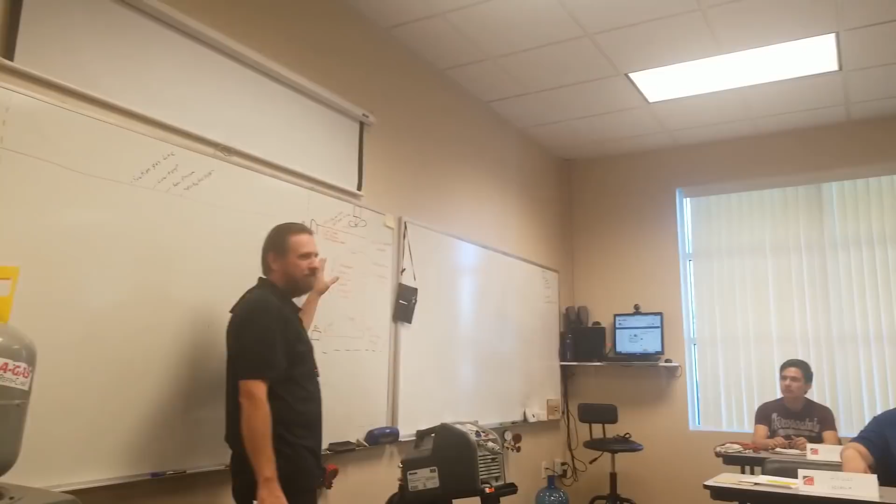All right, so we've talked about doing a pump down where we pump all the refrigerant to the outdoor unit. So after we do a pump down, before we work on this, we still have to get that last bit of refrigerant out of the system, right? Yep. We still have to recover it. Now, if it's microchannel, do you guys see the microchannel? Yeah. You see how important it is to look at the coil to see what it is first before you jump to conclusions? Yeah, very important, right?

So if it's microchannel or if the filter drier is behind the valves, we want to make sure that we do an entire recovery. The only difference between recovering from a pump down system and from a whole system is it's going to take much longer recovering from the whole entire system, especially with the compressor, because the refrigerant's mixed with the oil, and as you pull the refrigerant out of the oil, it's boiling from a liquid to vapor and absorbing heat, and the temperature drops, means the pressure drops, means it takes that much longer to pull out. So there's several steps involved with recovery.

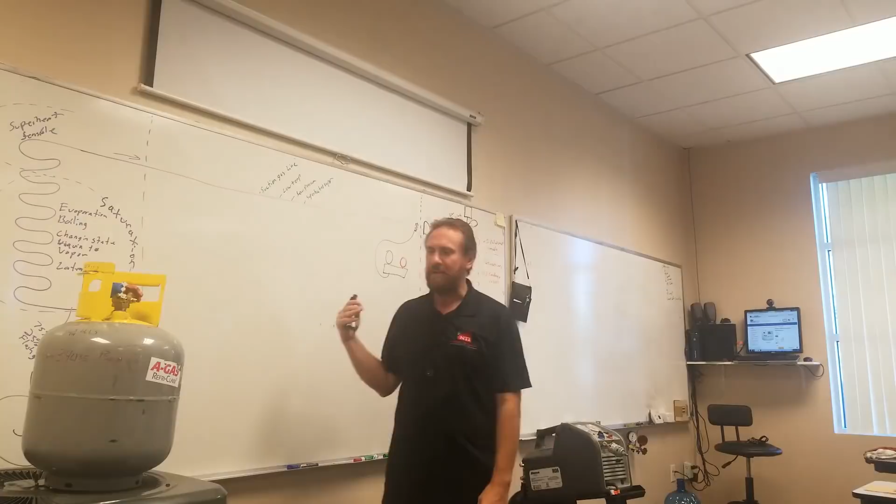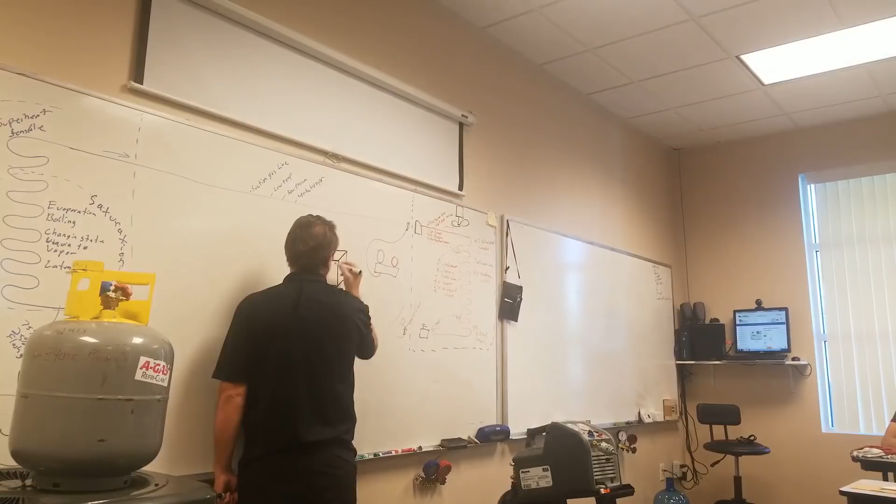First one we're going to do today is going to be the simplest of the processes. Okay? So we have our manifold gauge set hooked up, and now we're going to have that yellow hose, yeah? Yeah. So that yellow hose is going to go someplace. It's going to go to our recovery machine. It's a machine that recovers, yes. This is on the EPA test, guys. I'm going to ask, what's the yellow hose for? Yeah, I know. For the recovery. The really sad part is it's a question that needs to be asked.

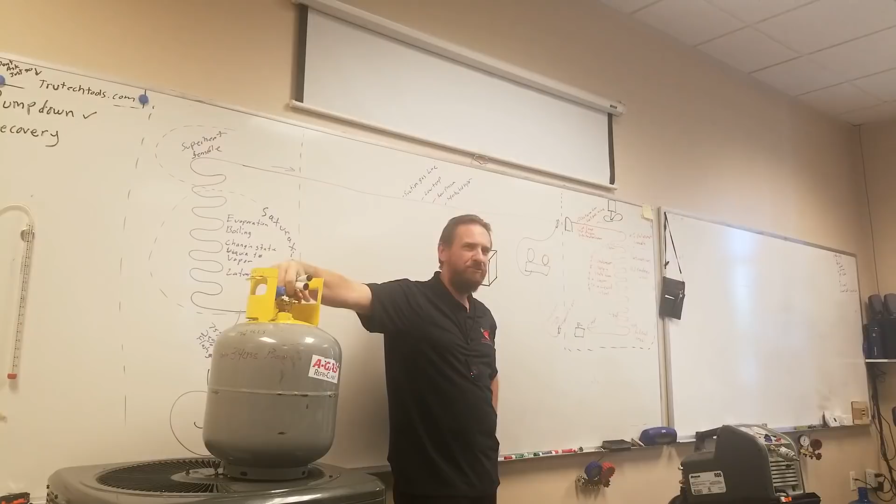So let's quickly define recovery. What is recovery? Take the refrigerant out of the unit in any state or any condition and put it into a recovery tank. So as HVAC technicians, what we do is we recover refrigerants. We take the refrigerant out of the unit in any condition and put it into a recovery tank. That's what we do. Now, there's only one recovery, but there's two other things related to it. One of those is called recycle, where you take the refrigerant, you filter it, you clean the oils, and you put it back in the system. We really don't do recycling. We'll get into that when we get to the EPA class.

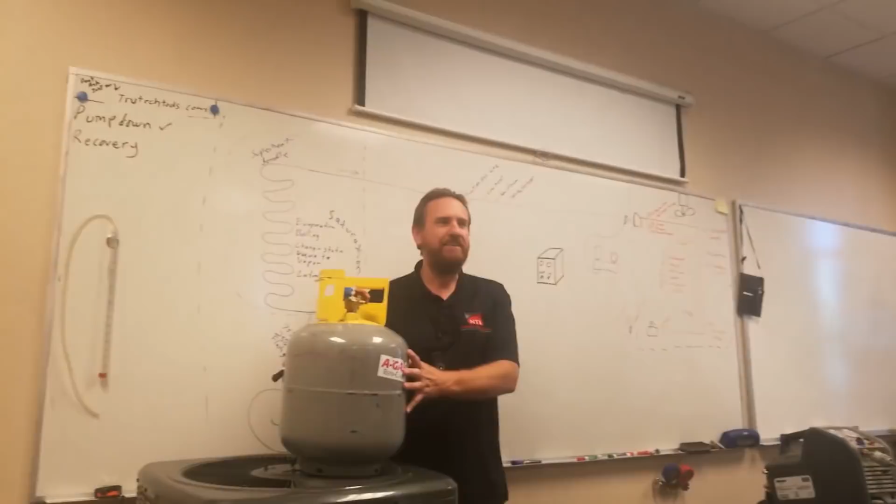And then the third one is reclaim refrigerant. So once I put the refrigerant in any condition into a tank, I'm going to take this back to the supply house, and they're going to send it back to a chemical company. And that chemical company is going to take the refrigerant out, filter it, clean it, and put it back to a brand new condition. It's going to be within a very small spec, and that's called reclaim. Reclaim is only done in a factory someplace far, far away, right? Far, far, far away. That's right. I was thinking that too.

So all we're going to be doing is recovery. Take it out of any condition, put it into a tank. It's separate from recycle and reclaim. It's the 3 R's for the EPA: recycle, recover, and reclaim. For some reason, so many people out there say, "Oh yeah, let's reclaim this refrigerant." I'm like, what? We're going to build a factory and all this test equipment and put it back to factory spec? No, we're going to recover it. We're going to take it out in any condition, put it into a tank. And for most of that, we're going to need a recovery machine.

Right? Recovery machine has 2 gauges in it, and it's got 2 ports, and those 2 ports are going to be in and out. And all this is is a pump. Inside of here, you're going to have a pump, and you're also going to have a little condensing coil because it's built to take it from low pressure to high pressure, so we need a way to get rid of some of that heat. So it's going to suck in low pressure vapor and pump out higher pressure vapor, right? It's a pump. That's all it is. It's pulling in and pumping out.

So it's going to have an in. Where do you think we hook that yellow hose to? To the in. Yes! Fantastic! Sometimes students struggle with this, so I'm really glad you guys got it. So that middle hose, we're going to hook it to the in port.

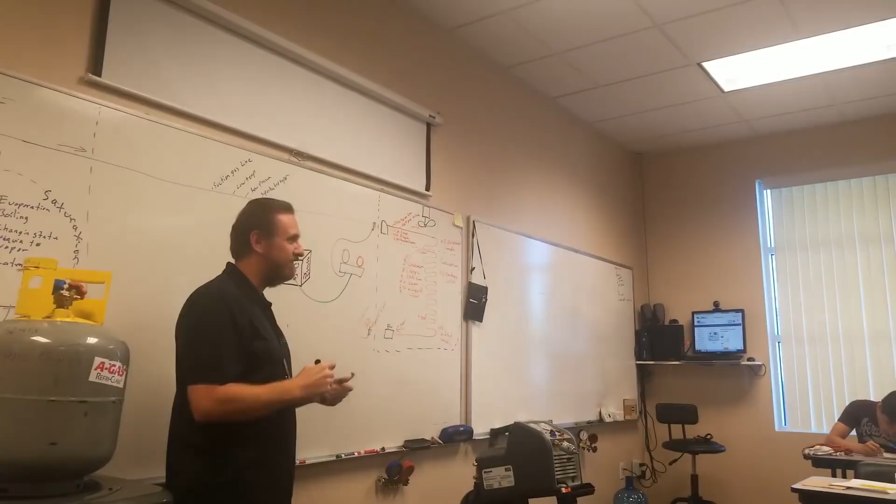Some of the stuff you get to do in HVAC, you work in famous people's houses, get to meet famous people. Going to the right hand of Steve Jobs on Friday, the software developer for Apple. They didn't bury it? Yeah, you're gonna be working. That's gross. Steve Jobs, no, totally. He's passed, his right hand when he used to work for Apple. Well, software developer for Apple.

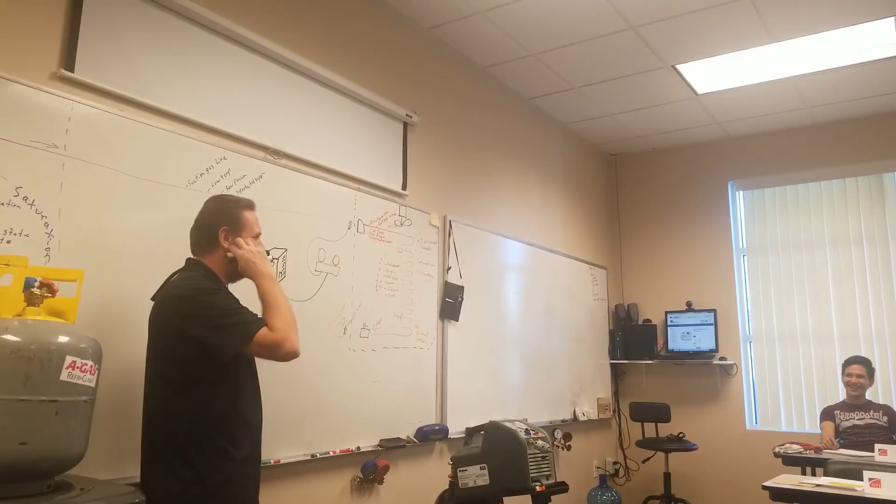That's kind of creepy. Cut off his right hand. That's gross. His right hand. Oh, his right hand man. Oh, that's completely different then. Yeah. You know, that guy's pretty cool. He was the brainchild behind a lot of that. No working with corpses. Of course not. I'm not certified for that yet.

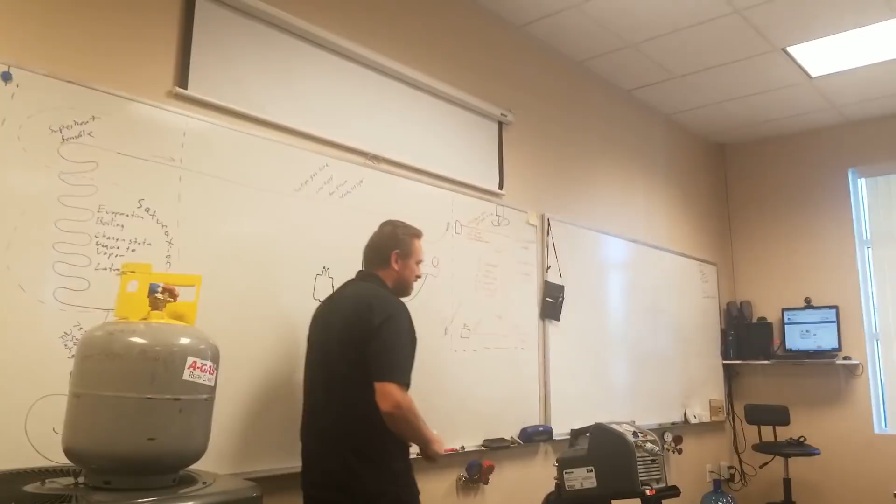All right, so we're gonna have the hose coming in here into the recovery machine. In the recovery machine, there's one that says OUT and one that says IN. Where are we gonna hook that yellow hose? The one that says IN, right? Now, usually what you're gonna have in addition is a little filter dryer. This way we can make sure that we protect our machine from whatever's gonna be in there. Usually on the inside, we're going to have one of these little miniature filter dryers. So we're filtering the refrigerant as it comes in, and then this does something special. It pumps it out to our recovery tank.

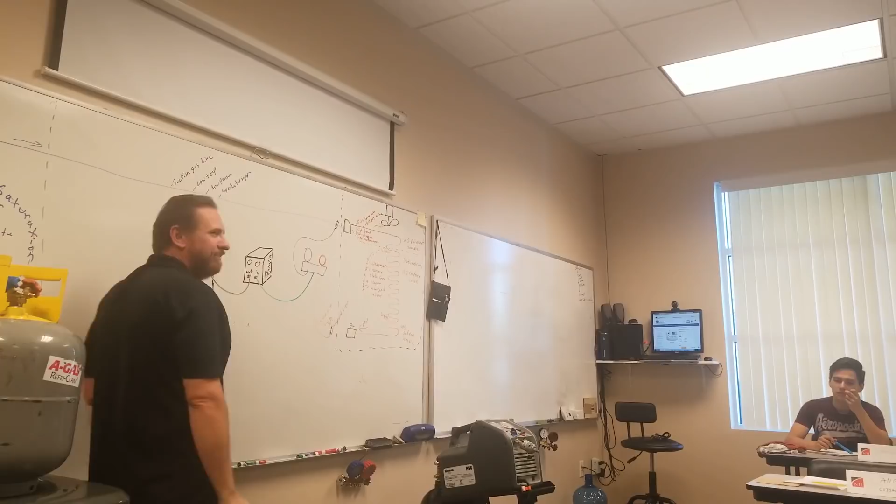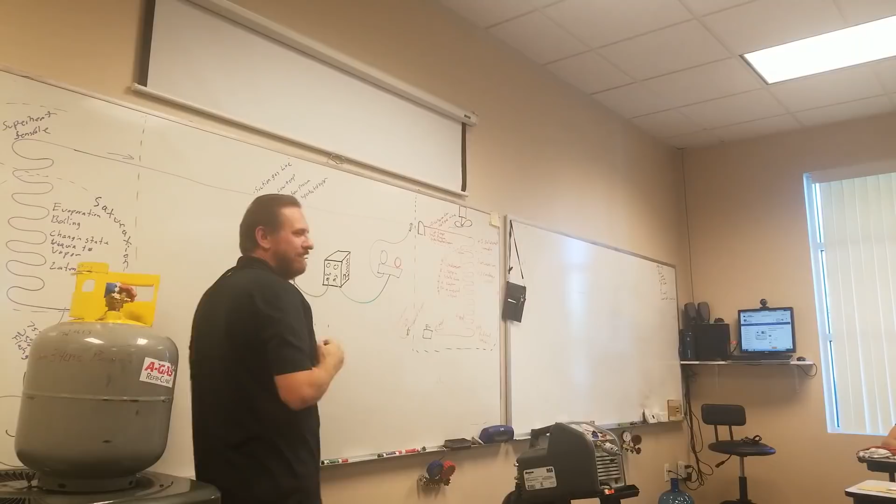So the recovery tank's going to have two words on it. It's going to have the word liquid, in which case it goes to a straw at the bottom, and it's going to have vapor. For right now, the simplest way, we want to hook the hose to the vapor side. That way, as I'm pumping refrigerant in, the refrigerant liquid will drip down to the bottom, and it'll be there. So it's easier to get it in the tank, whereas if you put it into the liquid side, you're having to push it down and then push all that liquid back up. It's just a little easier this way. So we want to hook it to the vapor port.

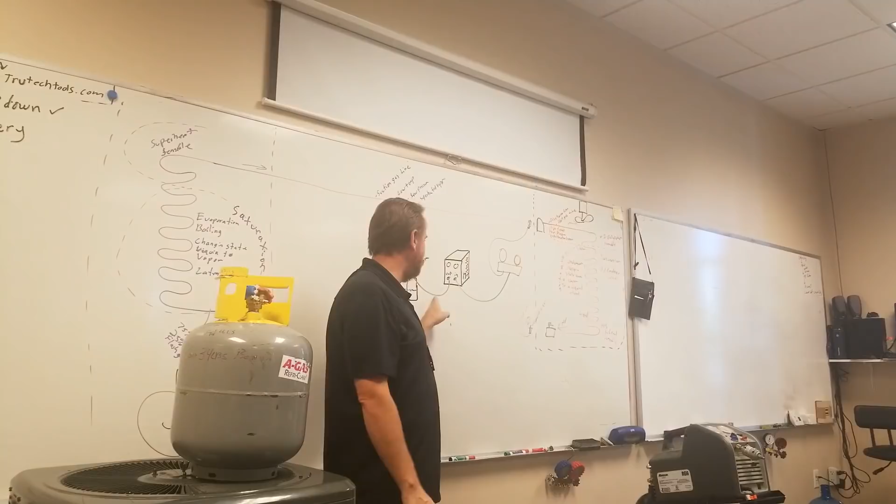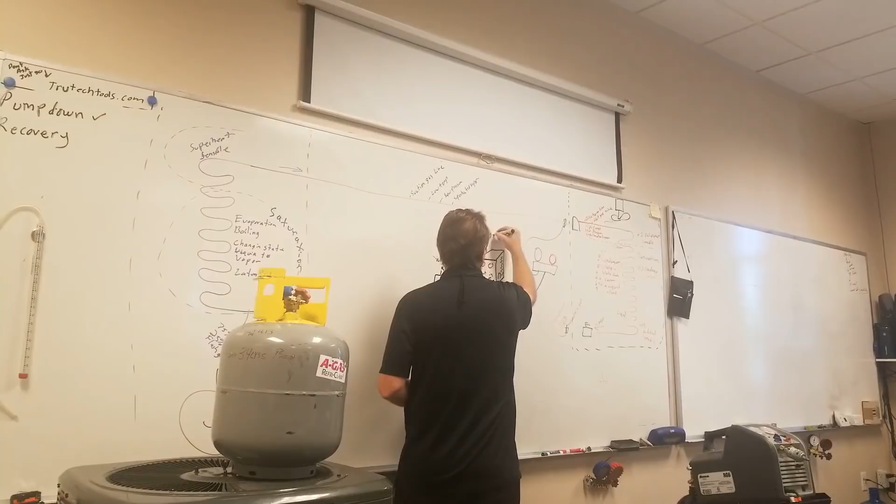But what's in this hose and what's in this hose? Did I ever turn anything on or open any valves? No. There's dirty, nasty, polluted, contaminated, disgusting air. Do I want to pull clean refrigerant through this disgusting, polluted air and then pump it through this tube of dirty, polluted air? No, we want to what? Purge it. So we want to purge. P-U-R, I don't know, purge. Yeah. We want to get all of that out. So if I have refrigerant here and my tank is still closed, everything's still closed, how can I purge it? Loosen the hose here.

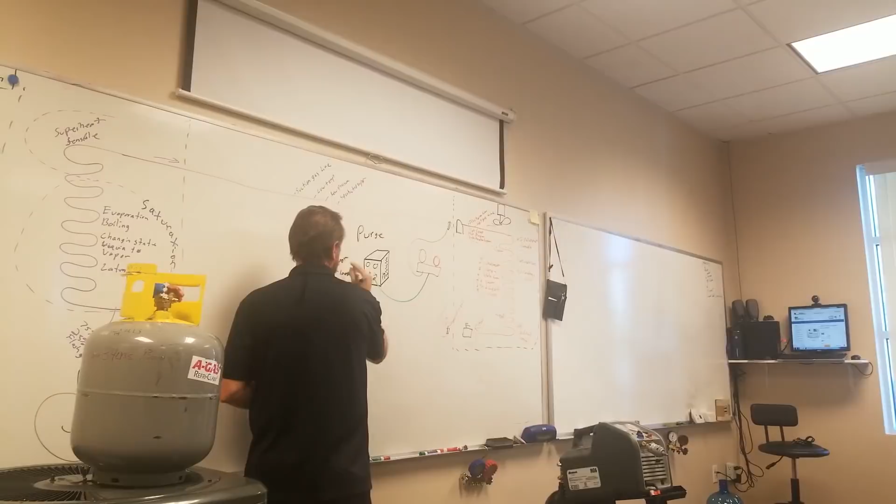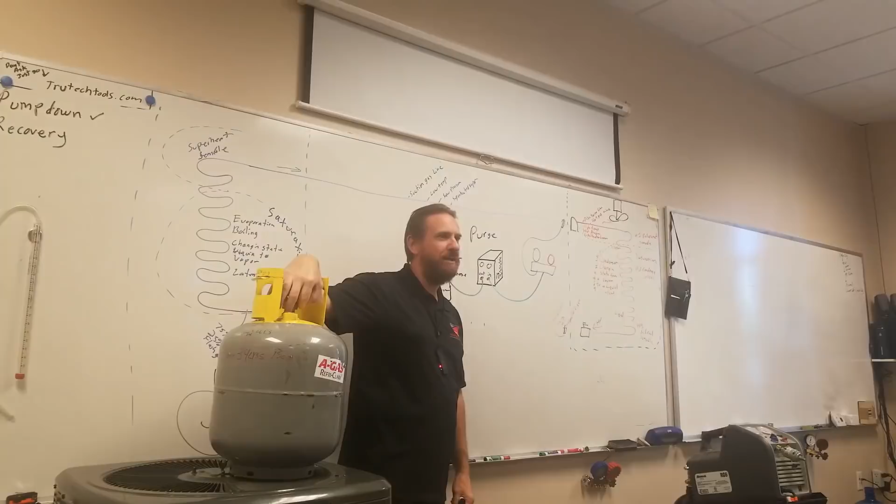Right? If it's loose here, the hose isn't tight, it's loose. Remember how when we did charging, we left the hose loose at the manifold and we purged the air out? I want to leave that hose loose. You guys look at me crazy. The hose, you don't thread it on all the way. You leave it loose. Okay. You had that lost look, so it scares me.

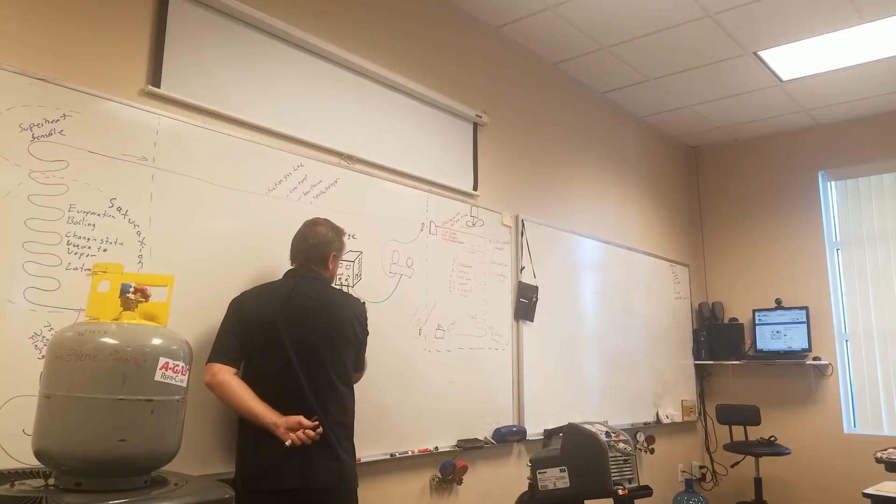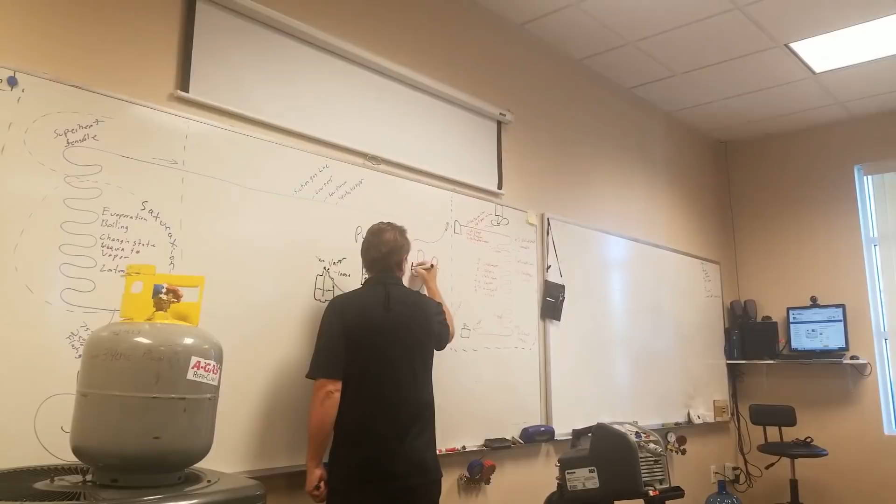So let me clarify. You put your low loss fitting here, and you put your low loss fitting here. So it's just a regular plain end right there. I leave it loose. I don't tighten it onto the tank all the way. Everything's closed. All valves everywhere are closed. So what I'm going to do then is open this valve. Is that going to let refrigerant pressure flow through here? Yep. Is that not going to want to push out this opening here?

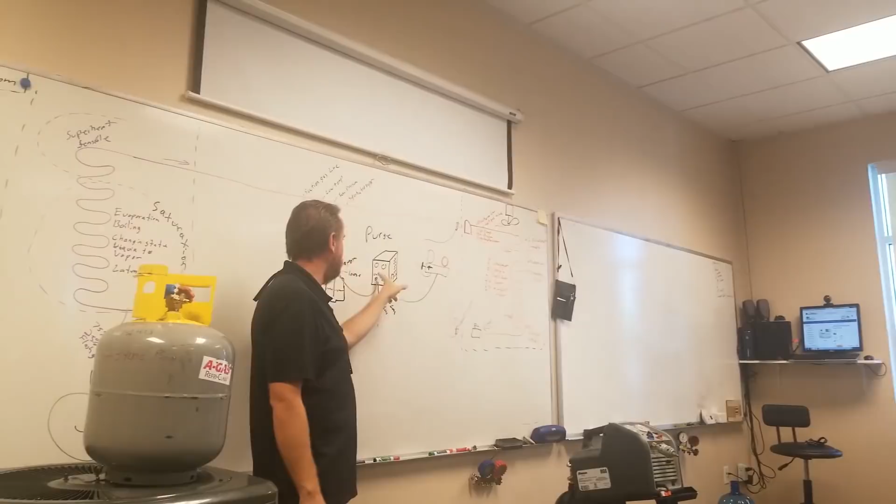Yep. It is. It's going to push through here, through my machine, through here, and it's going to push those contaminants out this loose end right here. So once you hear that, that's the air being pushed out. You want to then tighten that hose so it doesn't leak refrigerant to the air. To purge. We purge the system. I could write notes in here all day long, but think about it, loose here, and it's open here, it's going to push it through the system.

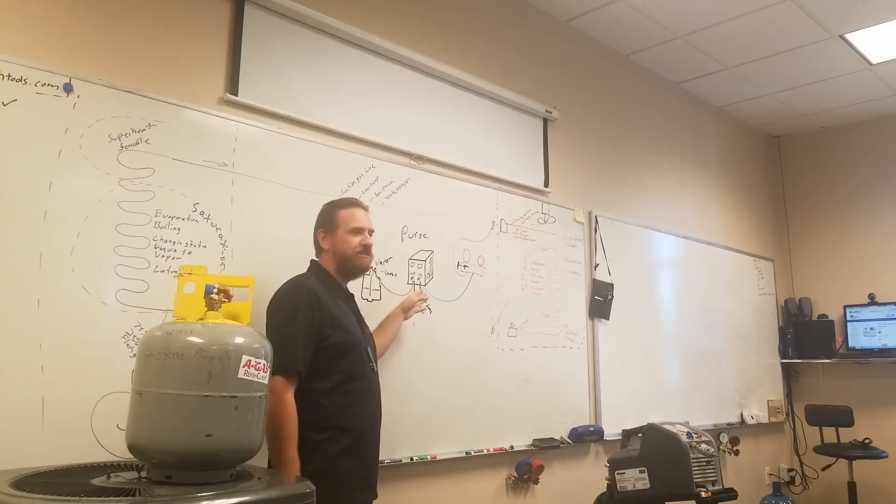Every recovery machine is a little different. Some have valves, so you loosen it here, you open that, and nothing comes on. Well, turn these valves to where it allows it to flow through. Does that make sense? Yes. That's what we want to do. We want to have my gauges. The yellow hose goes in. From there, the out is going to go to my recovery tank.

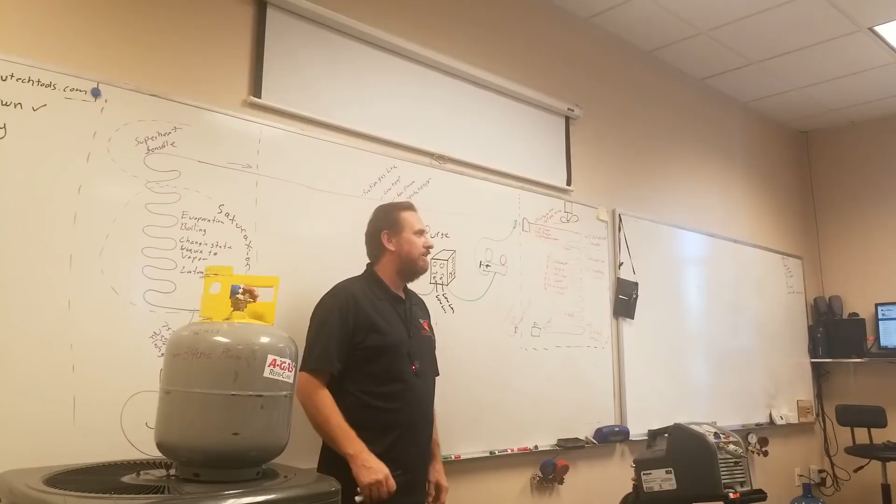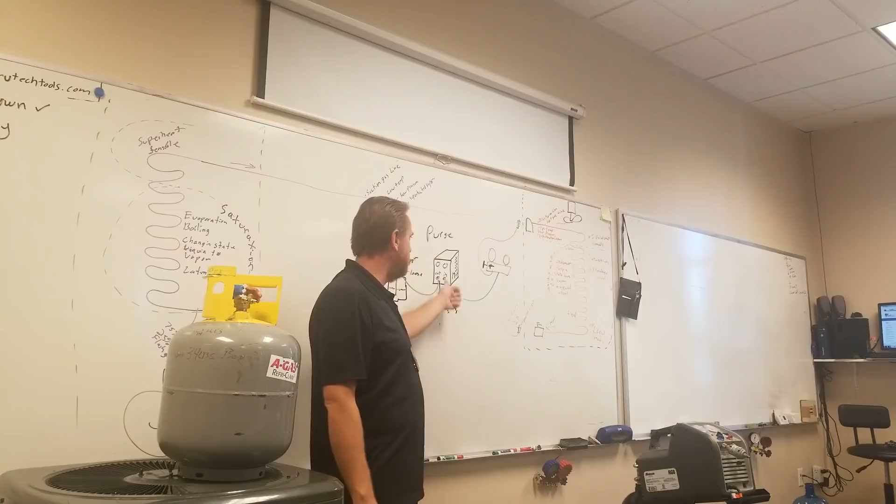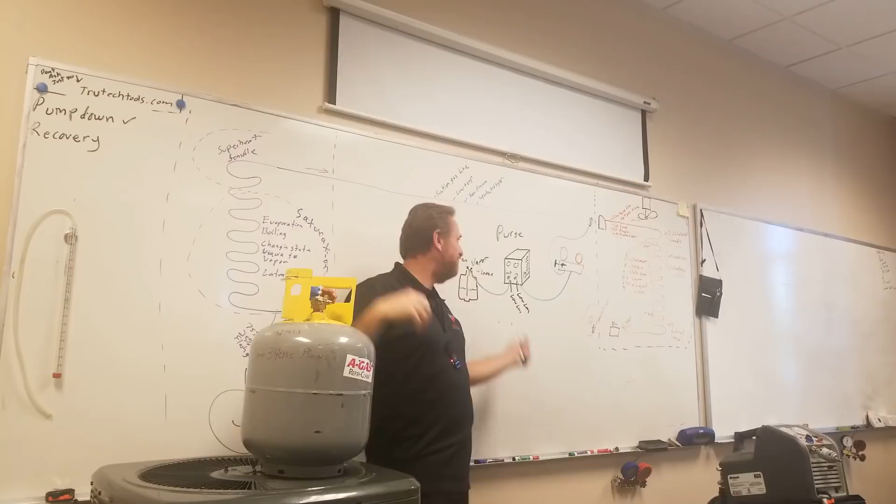So once I purge it, what do I want to do next? What do you think? Yep, tighten this. Then what? Turn the machine on. Okay, now it's sucking refrigerant here and pumping refrigerant here. Then what? You better make sure your tank's open. Let's open this tank so that we can actually let refrigerant go into it. That hose isn't going to hold all that refrigerant from the system, is it? So we've got to really make sure that we open that tank so we're actually putting refrigerant into this tank. Is that a good idea? Right? Open the tank? Yeah.

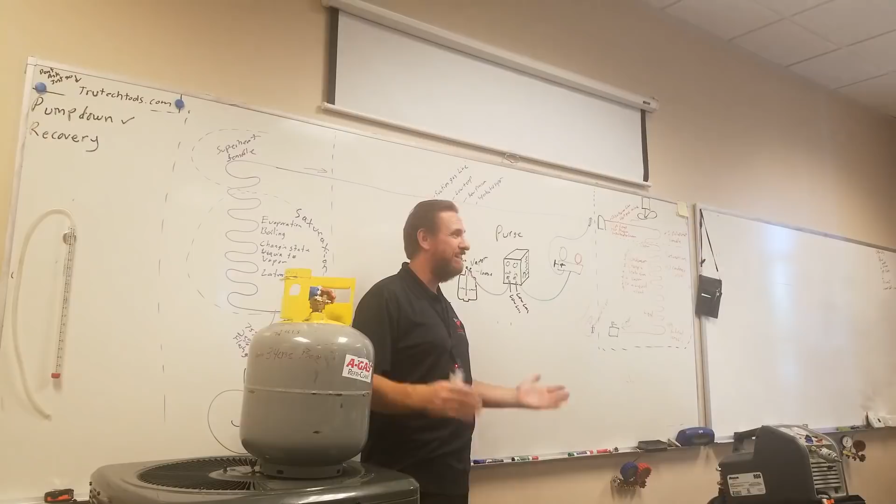So what we're going to do is hook everything up, leave it loose. Open this valve, make sure it's pushing through the system. It's going to make a little shh noise, and then you close that valve. You're purged. Then you're going to turn the machine on and very quickly open the tank. And it's going to pull the refrigerant out of the unit and into the tank. Most recovery machines have an automatic shut-off. So once they get down to a low enough pressure, it'll shut off.

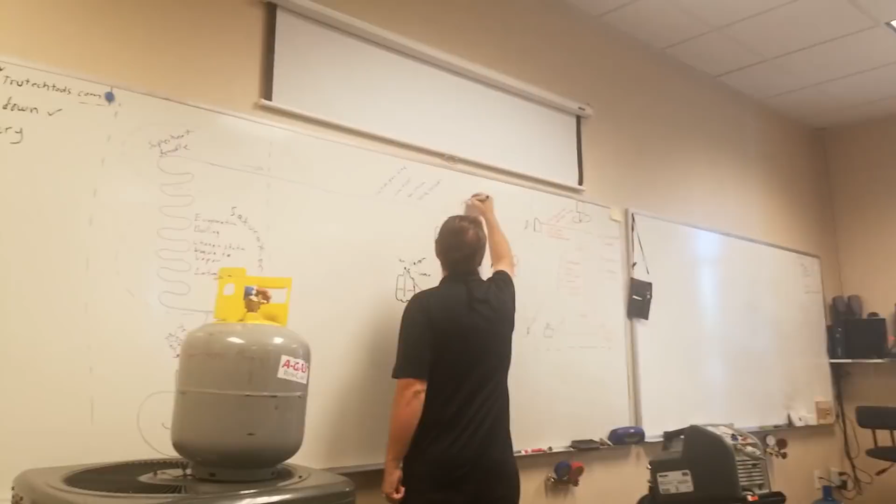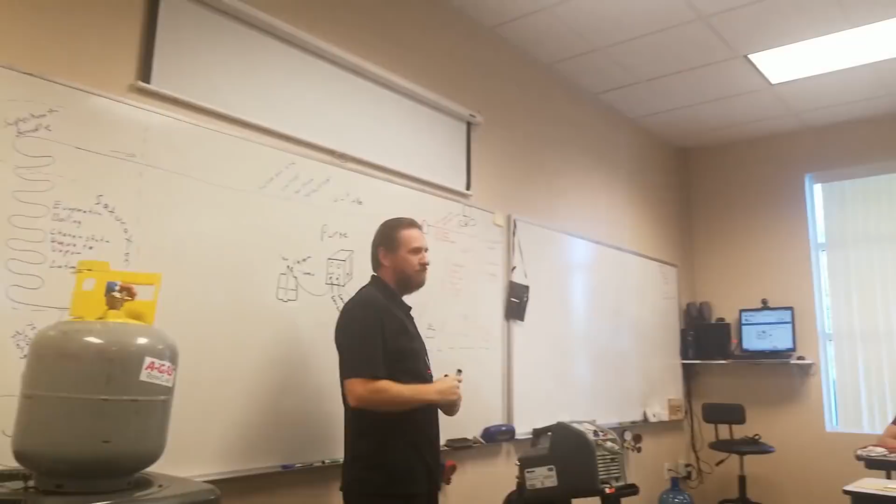We want to pull it down to ideally 10 inches Hg. It'll be inches Hg. We're really looking for 10. The letters Hg, there's no dots. Hg is on the periodic table of elements. It stands for mercury. Inches of mercury. They used to measure anything less than atmospheric pressure by inches of mercury. So we want to pull down to about 5 to 10 inches of mercury. We want to make sure that we're below atmospheric conditions, that we've pulled all that refrigerant out of that system.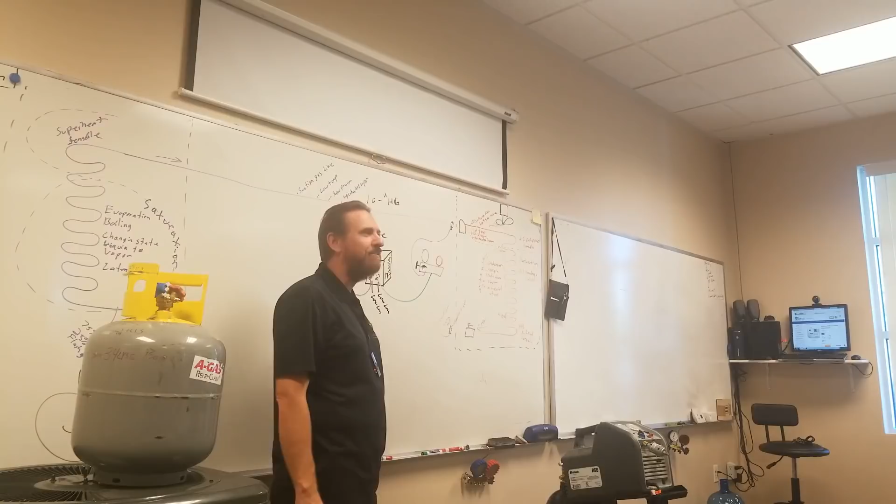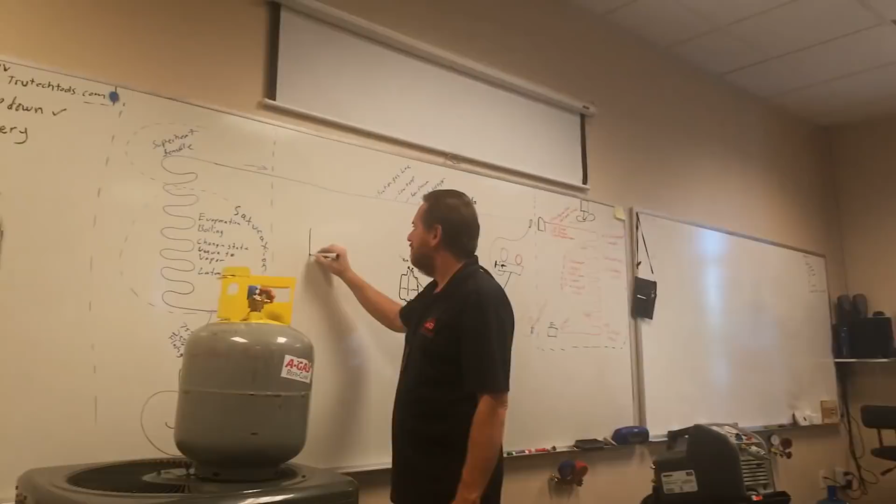Yes? Is there mercury in the recovery? Nope. It's just a measurement. So remember us talking about water has weight? 10 inches of water in WC. So this is really a separate topic. Water has weight, and let me draw it better. Water has weight to it, and the atmospheric pressure has weight as well. Let me give you an example. I'm trying to think of the quickest way to explain it.

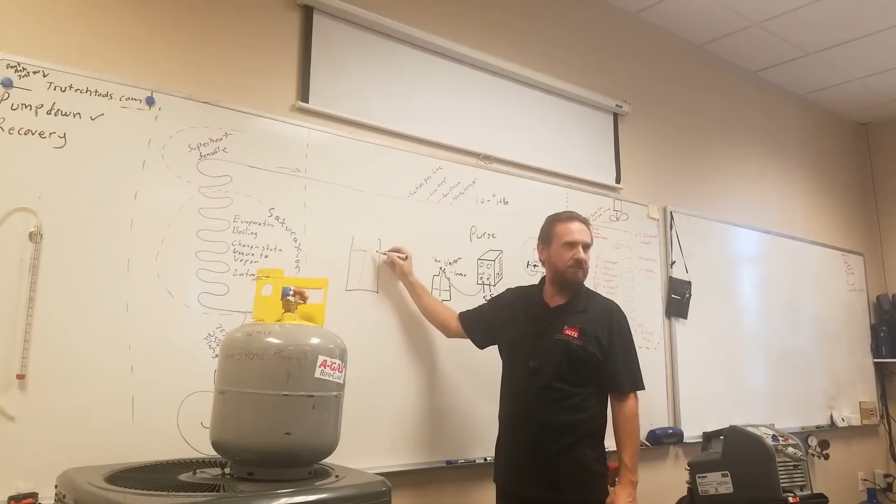If you have a cup and you put a straw in this cup, there's liquid in here. What's the liquid level in that straw? The same. Exactly, right? Everything's level. Now when you put your mouth on that straw, you increase the volume in your mouth. So everything's compact when you seal around the straw, and you actually increase the volume inside of your mouth. When you increase the volume, what does it do to the pressure? Drops. When you increase the volume, you have a pressure drop.

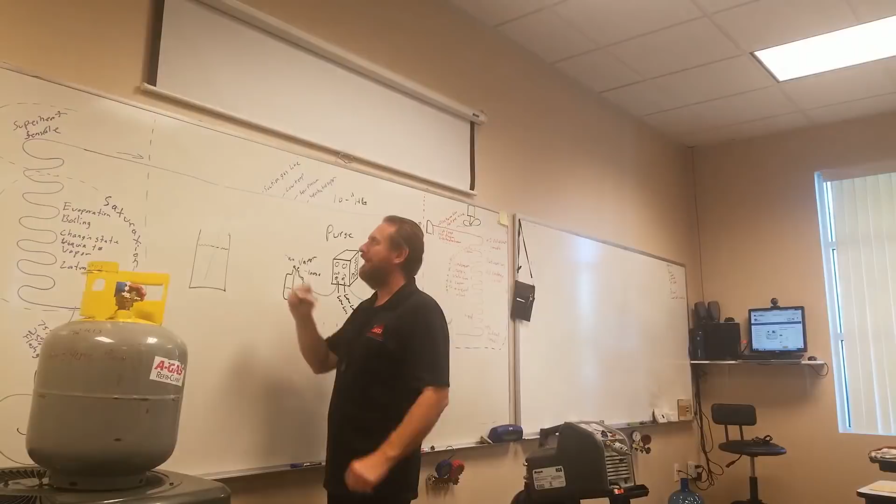So now, in your mouth, there's less pressure than the air around you. So the atmospheric pressure around you is greater here, pushing on this. It's the air pressure being greater that actually pushes the liquid up the straw.

All right? It's the air pressure that pushes that liquid up the straw. It's not so much you pulling it in, it's the air pressure pushing it in. Same thing with the vacuum cleaner. Right? A vacuum cleaner, you have atmospheric pressure. It's not actually sucking into it. It's really making a pressure difference. It's the atmospheric pressure on the outside that's pushing to that lower pressure. And it's moving so fast, it pulls dirt and stuff in with it.

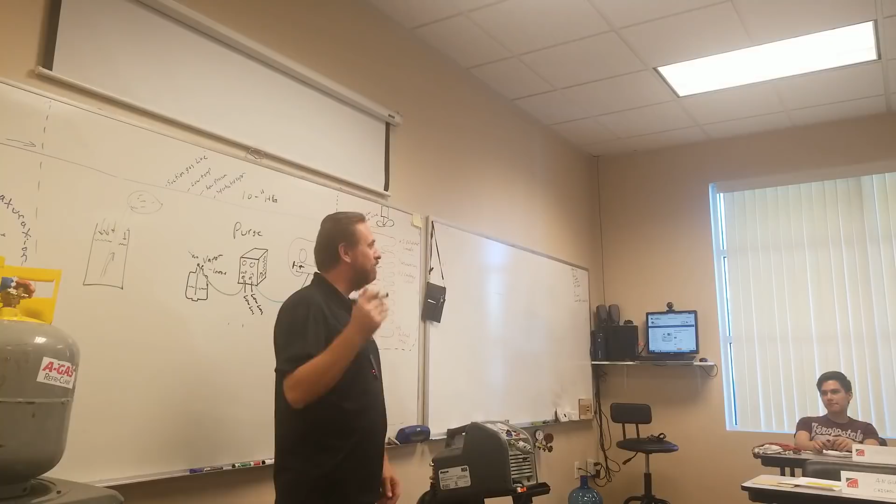In space, would a vacuum cleaner work? No, because space is already a vacuum. So a lot of people get confused about that. Like, well, how can space be a vacuum? Especially some of the flat earth people I've talked to. Well, how can space be a vacuum? What, is there like a big pump out there that's pulling it? No, there's not. There's nothing in there. Vacuum is nothing. On Earth, because it's round, sorry to break it to you,

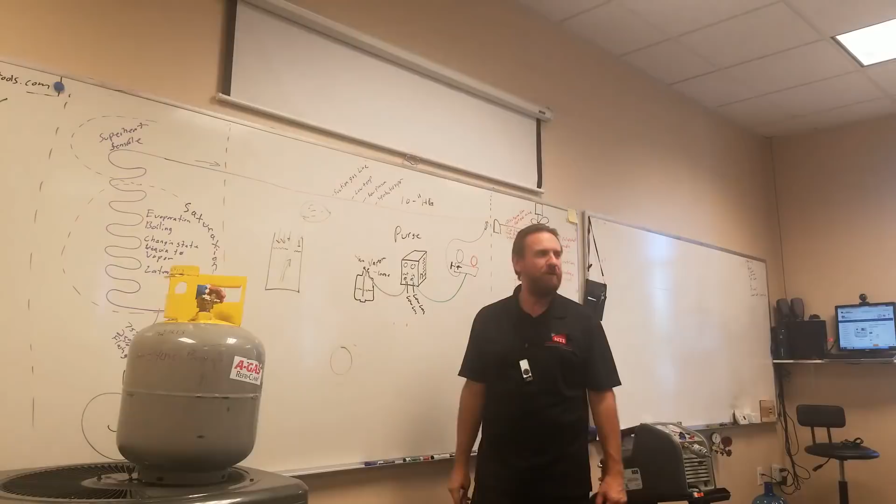we have gravity and we have all these different gases that have weight. And all of these gases are pushing down and have weight, and they're pushing down here. So we are at 14.7 PSI atmospheric all the time. We're under pressure. Right now, we're under pressure. Right? But we don't know we're under pressure because we've lived our whole life like this. We don't realize that we're under pressure.

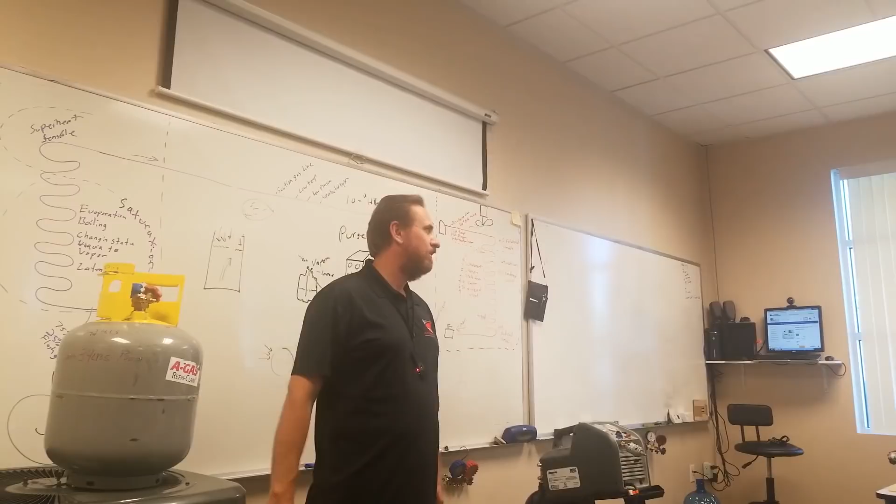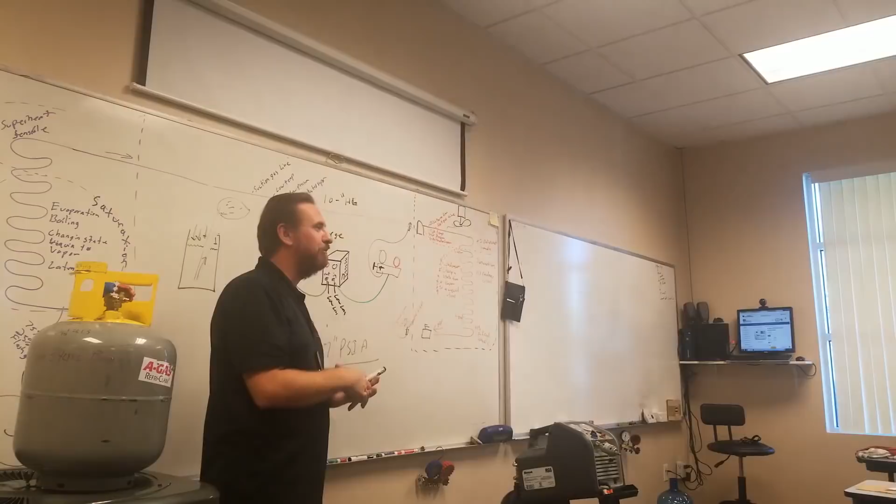When you go fishing, you may have been deep sea fishing. You've been deep sea fishing? So when you pull a fish up from the very bottom, what do his eyes do? Pop out. They pop out because he's lived his whole life under pressure. He didn't know there's a problem, but you pull him up fast, there's no longer that pressure on him. His eyes pop out. The fish is larger out of that water than he is in the water because there's no pressure pushing on him anymore.

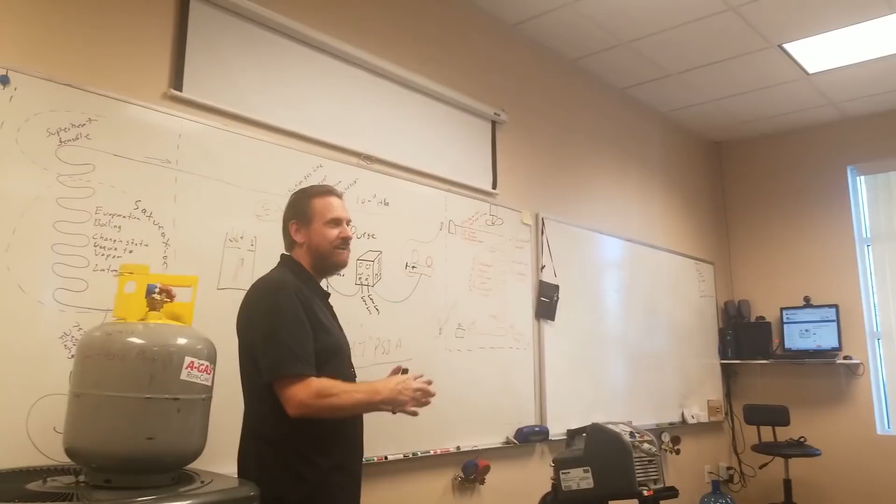I can take that balloon back there and I can put that balloon in that vacuum chamber and inflate that balloon without putting any pressure in that balloon. It's because of the atmospheric pressure on it. And if I take the atmospheric pressure away from the outside, the pressure inside is greater. It'll actually inflate. Does it make sense? Mm-hmm. So around us all the time is pressure.

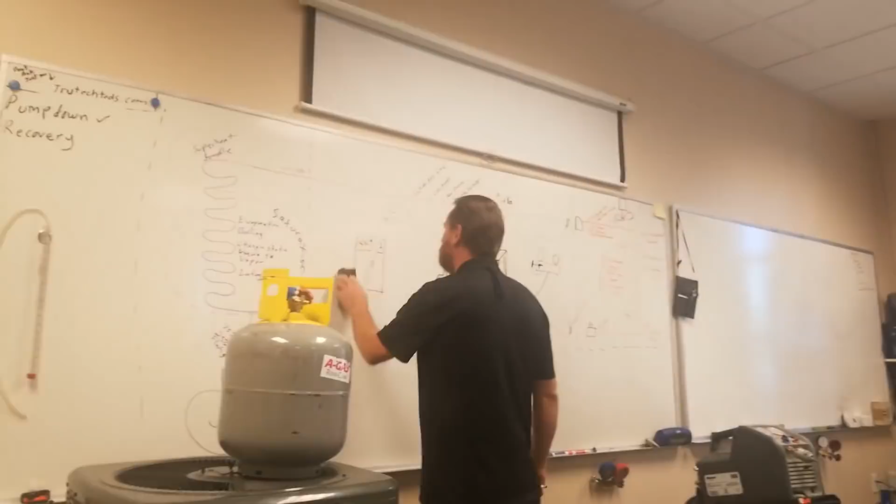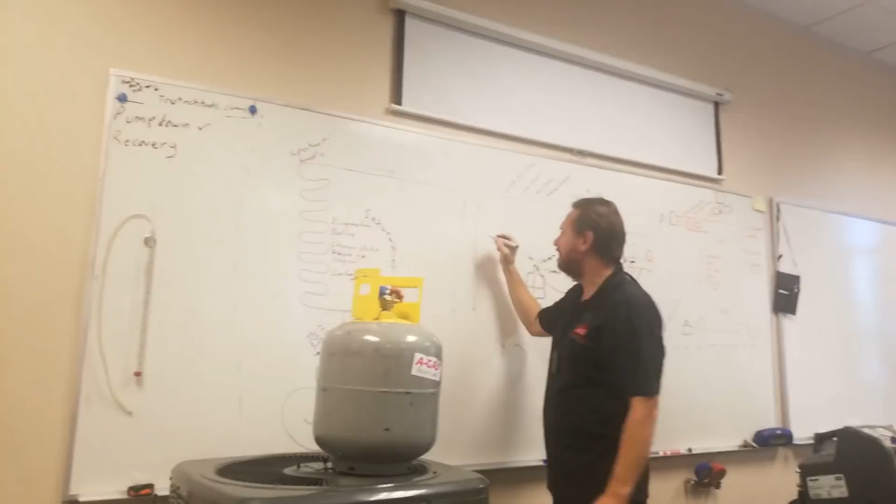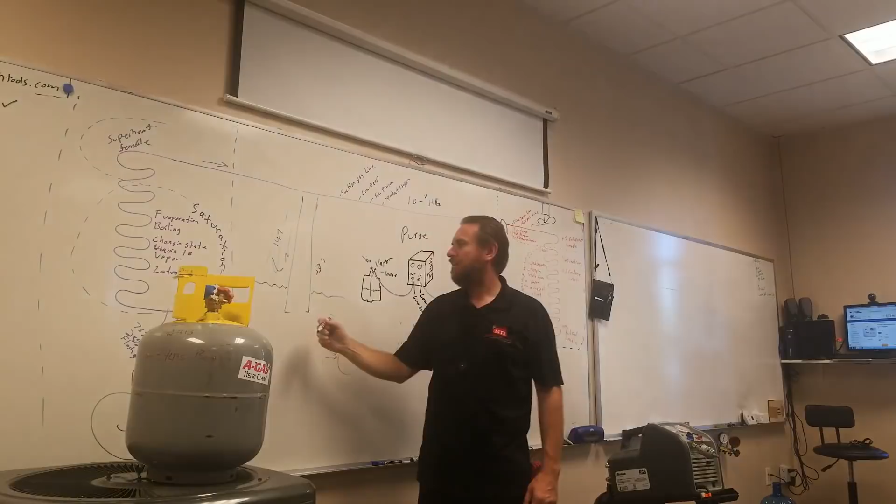So water has weight, and what they found in plumbing was they could pull water out of a well with a pressure drop. I can't remember the exact number, but I think it was 33 feet. They could pull water up 33 feet high. A column of water, 33 feet. What that really means is that at the bottom of that well, where the water is, the 14.7 of atmospheric pressure pushing down, you could only make a pressure difference great enough for that 14.7 to push that water up 33 feet.

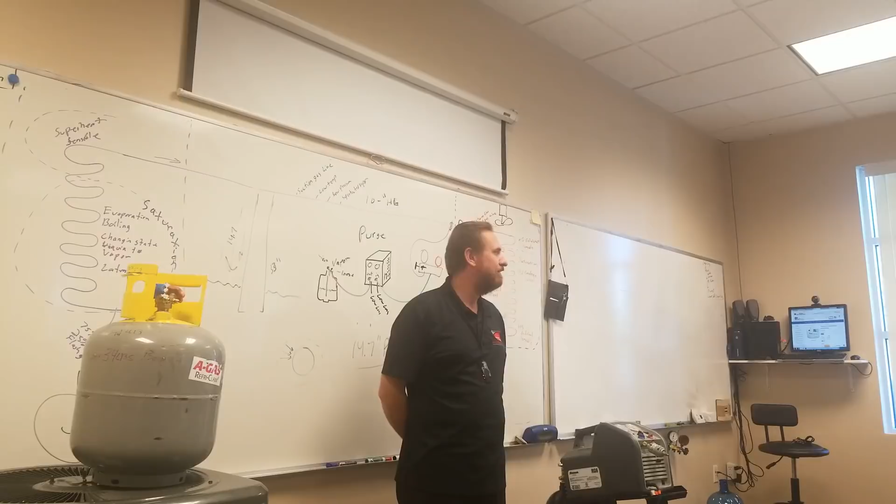And it balanced out. The weight of the water and the best possible vacuum you could get, I think it was 33 feet high. That was the best you could get out of it. And it was because of the weight of the water. Before then, they always thought that vacuum was this thing. And they thought, well, you can only make so much suction. That's all you can get. Well, then they got to realizing that vacuum isn't a thing. It's just less. There is no such thing as a vacuum, is what I'm trying to say.

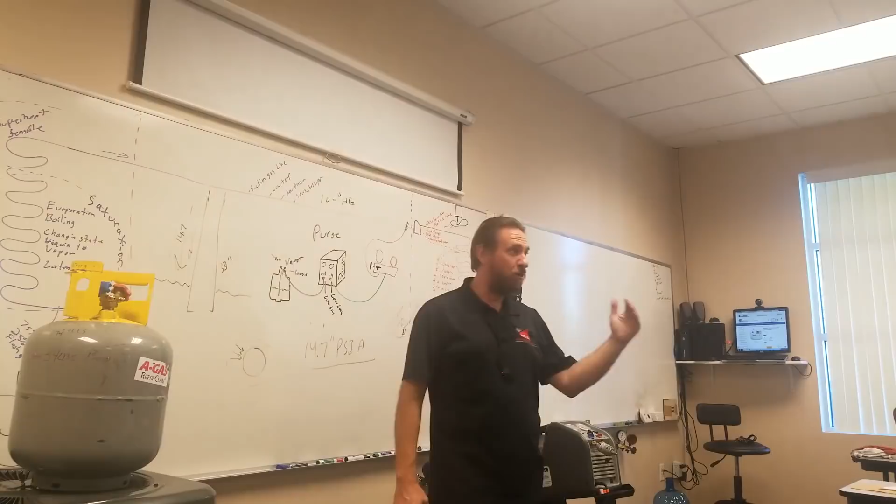There's no such thing as a vacuum. There's either more pressure or less pressure. Here, we have 14.7 psi on us all the time. So when I'm making what you guys think of as a vacuum, I'm just simply removing pressure. I'm having a pressure difference. The higher pressure is going to push to the lower pressure. So it's actually pushing up. So the water can only go 33 feet high. So they could actually measure how much of a vacuum you had by 33 feet of water. But it was very difficult carrying around a tube of water 33 feet long.

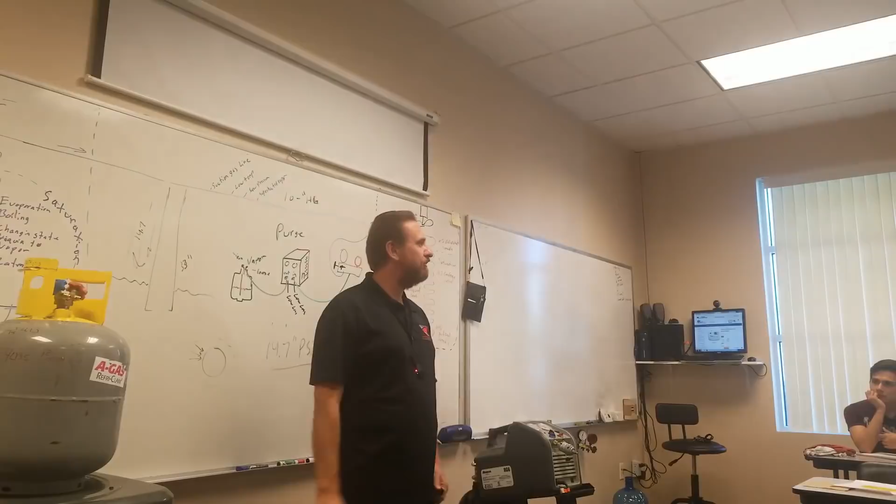So mercury weighs much, much, much more than air. Mercury is much heavier than air.

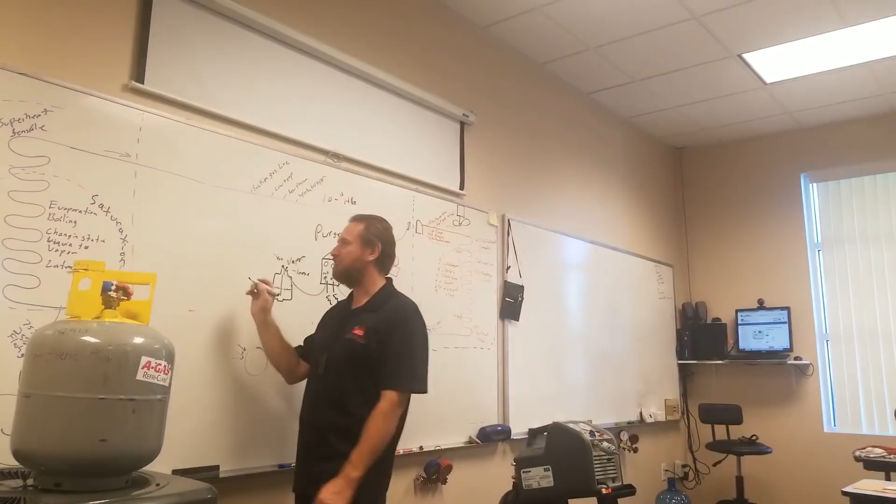Mercury is extremely heavy. It's a lot of very loud music. It's a heavy metal.

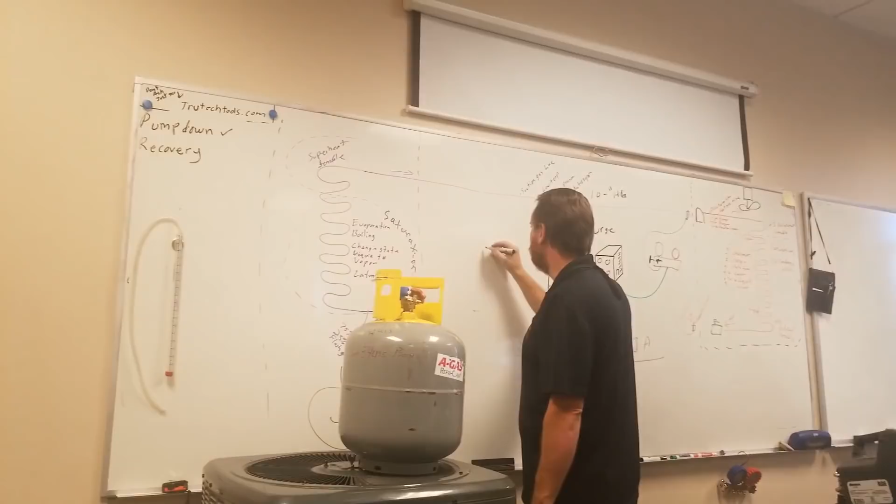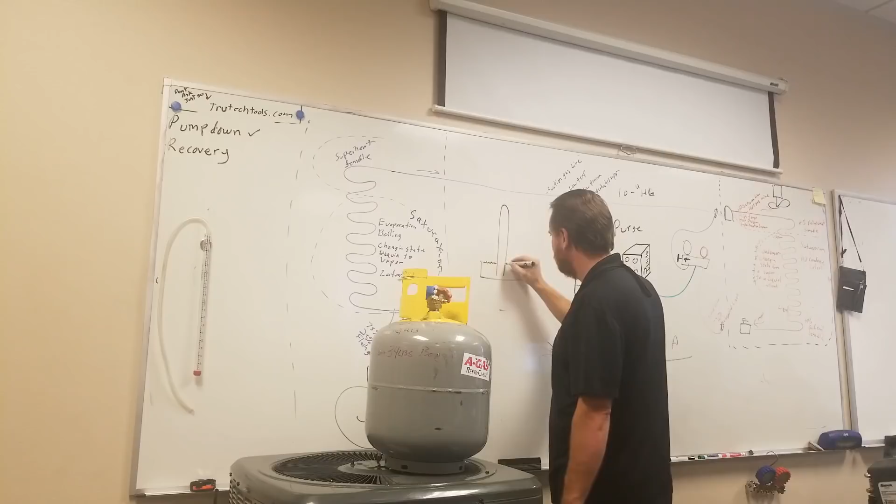But it's liquid form. Someone do the... Yeah, no, it's too late. Do it quickly. Yeah, it's too late. It's too late. Don't do it. Alex, don't do it. Doesn't want. Sorry, I failed. Your app's telling you to stop.

So what they would do is fill this tube with mercury. Mercury is a lot heavier, so this tube only had to be 30 inches high. As it pulled a vacuum down, we could change the height of that mercury so many inches. So we can pull it down to nothing, which is what we call a vacuum of 30 inches of mercury. Really, it's 29 point something. But we really need to get 10 inches of mercury.

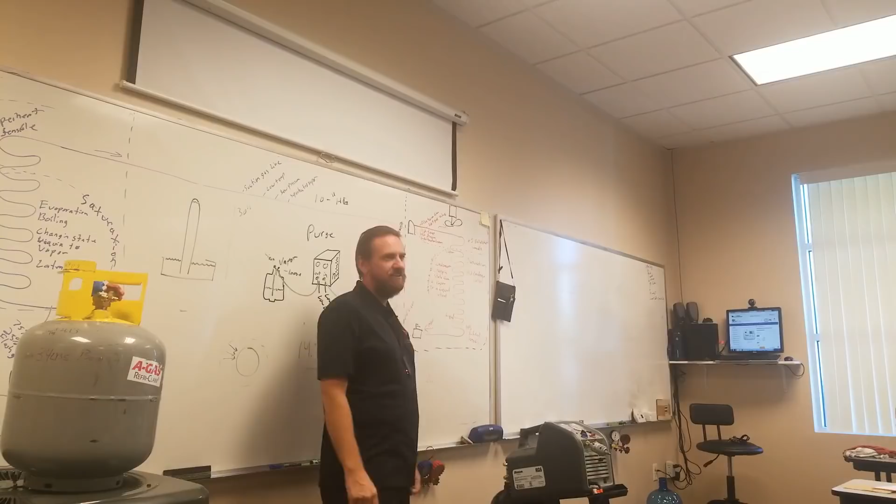So we actually have a thing of mercury and a tube in it. It's actually where barometers came from, measuring atmospheric pressure. It's just the opposite way. So when it talks about 10 inches of mercury, it goes back to the day. But we don't have to worry about mercury anymore because we have a pressure gauge. It's called a compound gauge. The suction side is a compound gauge because it measures positive pressure and negative pressure. So this compound gauge reads high or low.

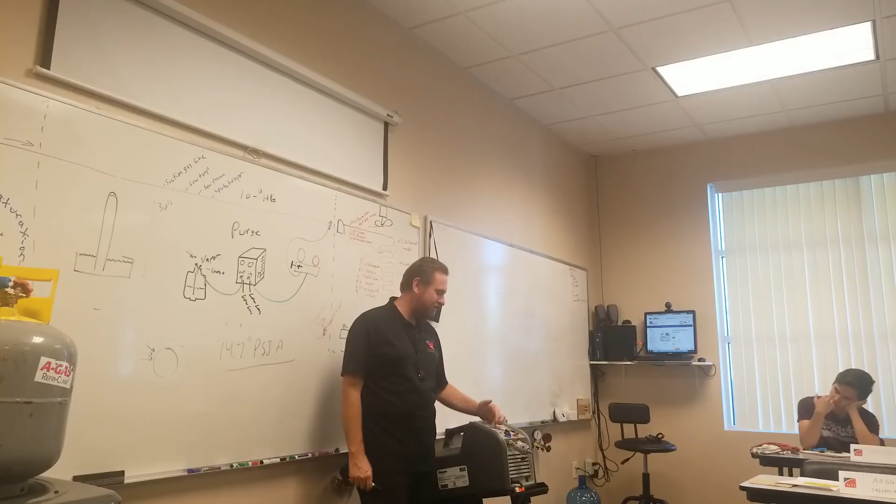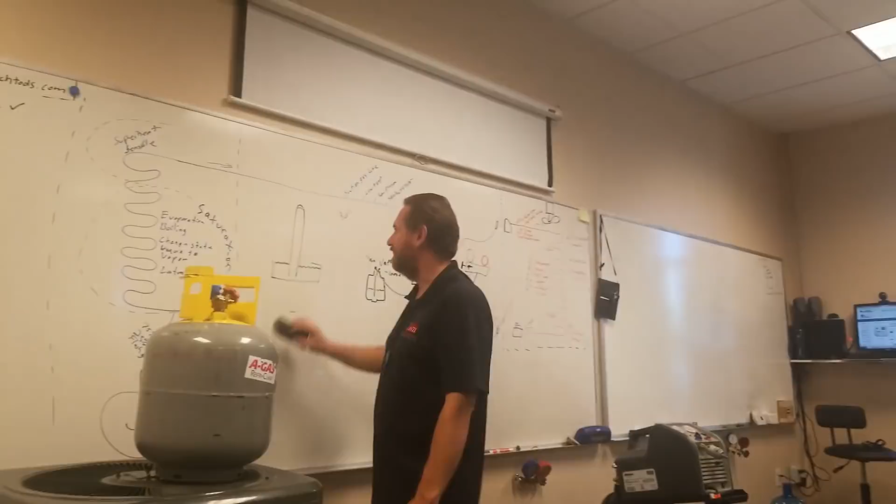But anything below 0 psi gauge, we call inches of mercury. And it goes back to the day of yore when they had actual mercury barometers. Still call it inches of mercury, just like inches of water column. Right? So, moral of the story is, you want to pull it down to 10 inches Hg of mercury.

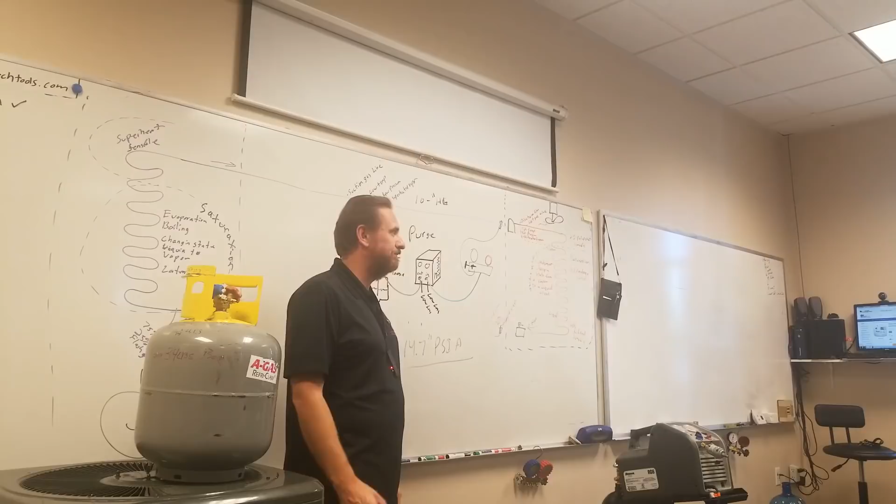We're not using mercury anymore, but it's like horsepower. We're not measuring how fast our car goes by the horses from the 17th or 16th century, right? But we still call it horsepower, right? So we're going to call it inches of mercury, even though we're not really using mercury anymore. Because standards. So that's what we want to do. Let's go back again, because now we've probably forgotten the main thing, right?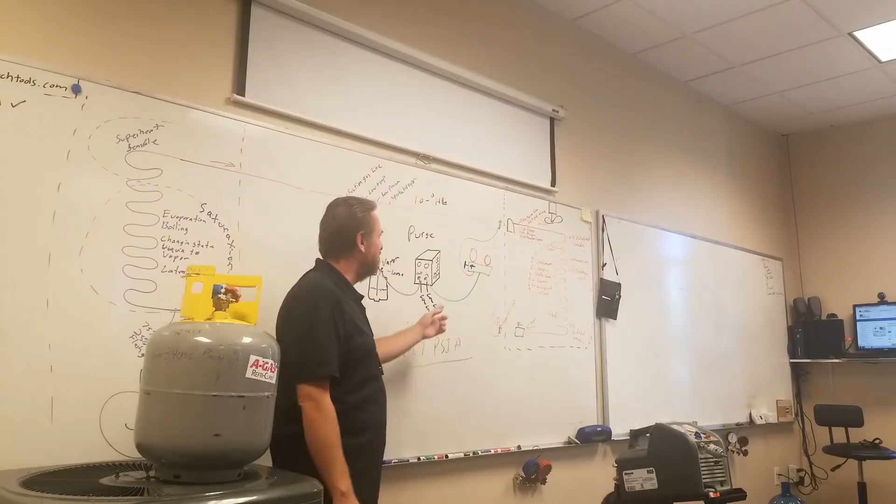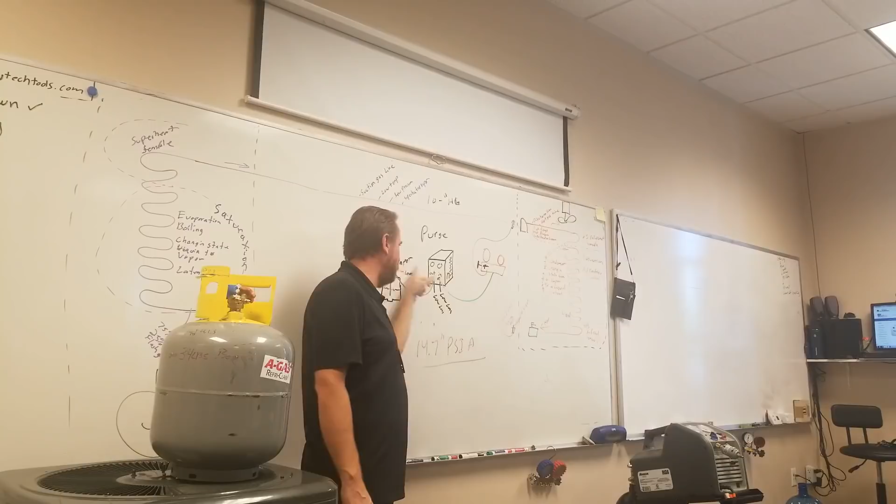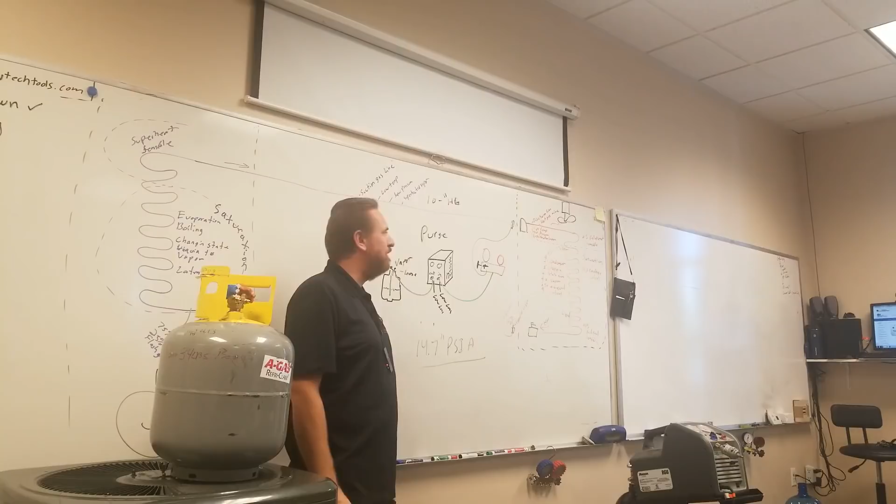So we're going to hook our gauges up. We're going to the yellow hose to the inside. The outside is going to go to the tank. Low loss fittings both go in the machine. I loosen it at the tank. I open the valve. I purge it. Then I screw it on all the way to where it's not leaking out anymore. I turn the machine on to immediately open this tank so that it's pushing the refrigerant into the tank. I want to do this until it gets down to 10 inches of mercury. Then I can close this off and shut everything off.

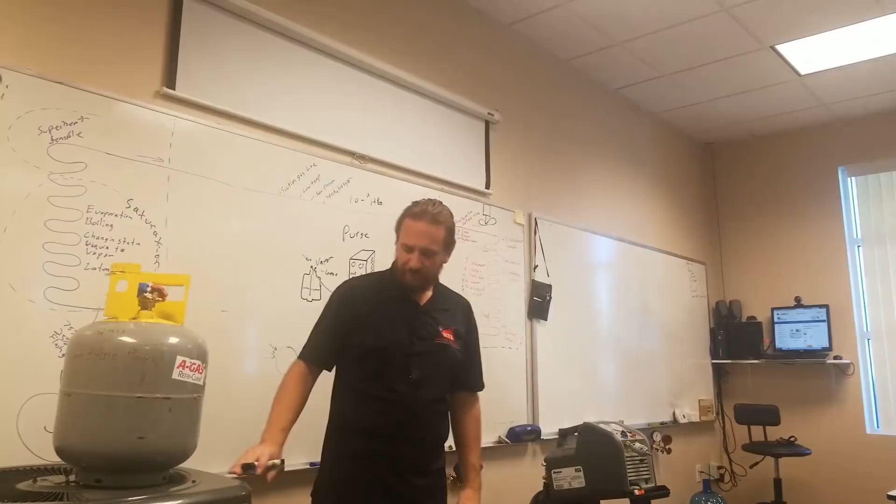All right? We have a package unit outside. We're going to work on it. Severely overcharged. I've been waiting for this day to come so that we could recover that extra refrigerant out of there so that we can actually charge it and have that unit running. So instead of having two lines with an inside unit and an outside unit, it's going to be one packaged unit, inside and outside all together in one package. That's why we call it a packaged unit.

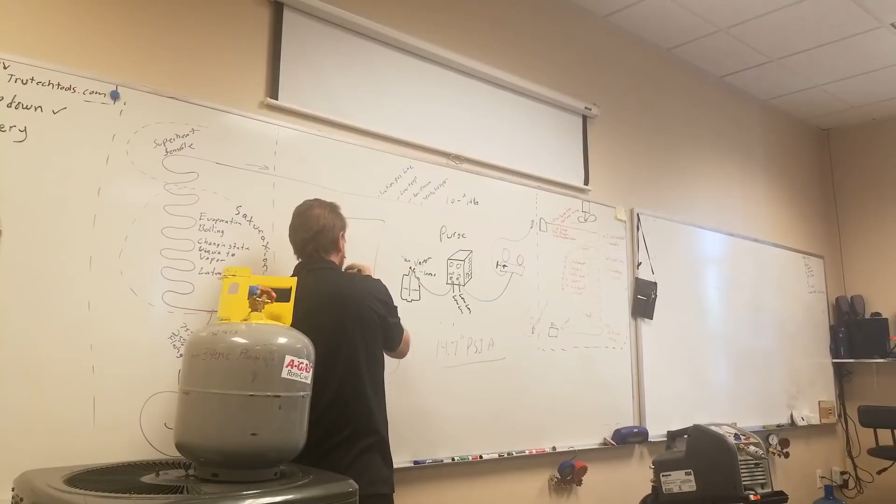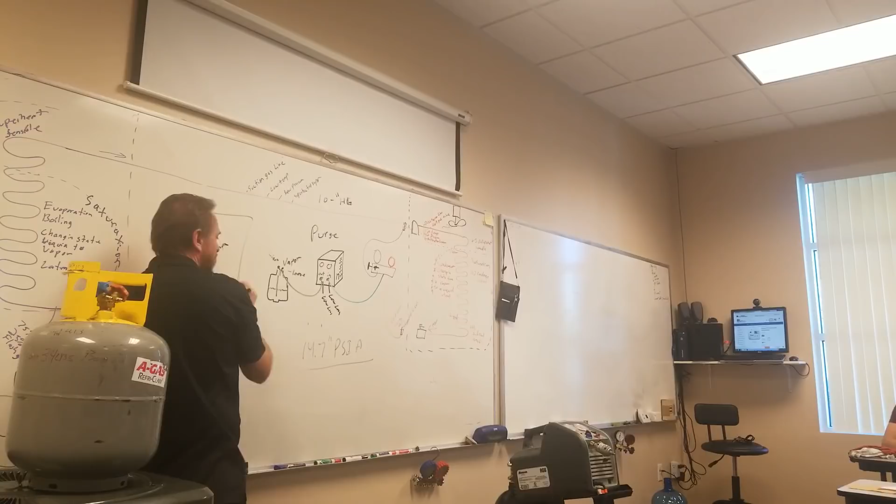And we're going to have two ports where you can put your gauges on the side. The port on top is going to be for high pressure, usually. The port on bottom is going to be for low pressure. We're going to hook our red gauge to the one that's higher, the blue gauge to the one that's lower. Then we're going to recover all the refrigerant out of that system. Recover it into what? Recovery tank.

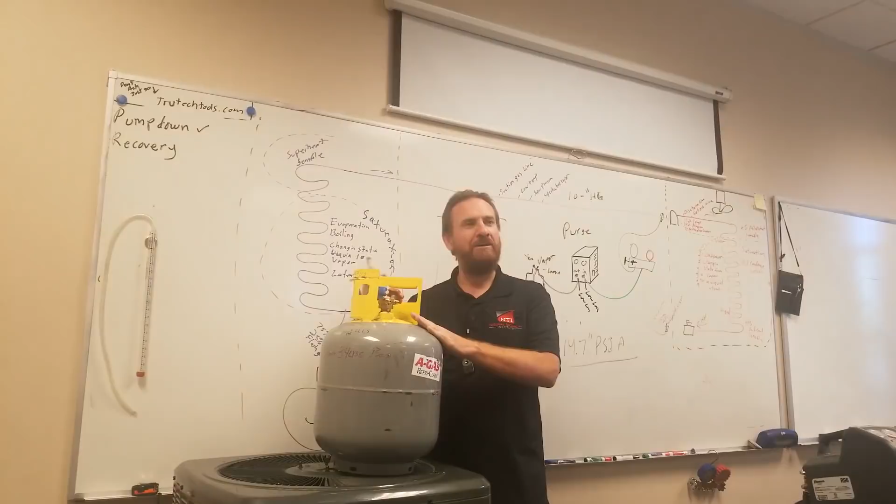Now, this recovery tank needs to stay 410A. We still have a lot of things we're going to talk about with just this tank alone. But first, let's get this first step done. All right? Let's go to the lab. Let's make this happen.